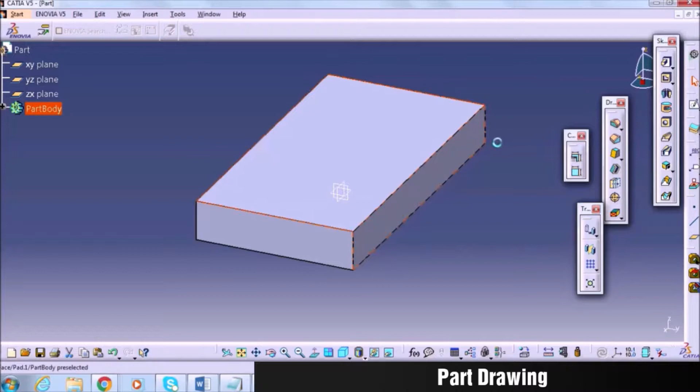Select the surface and go to sketch. Draw a smaller rectangle inside the surface. Each side must be equal to 10 millimeters equally.

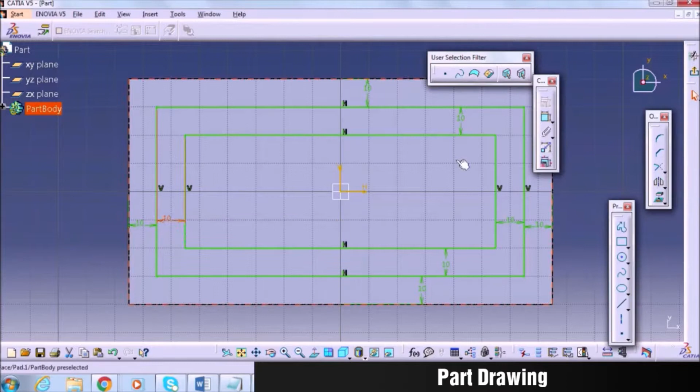Draw another rectangle shape inside the smaller rectangle with another 10 millimeter equal distance, and then corner it with 10 millimeter radius.

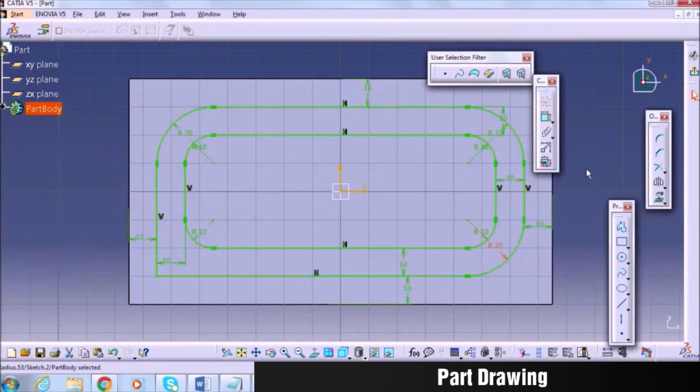For the second larger rectangle, corner with 20 millimeter radius. Exit workbench and pad it with 10 millimeters.

Then sketch the outer rectangle and draw a circle at each corner of the plane with the length of 10 millimeter sides.

Then mirror the circle at the center for 4 parts, 4 corners.

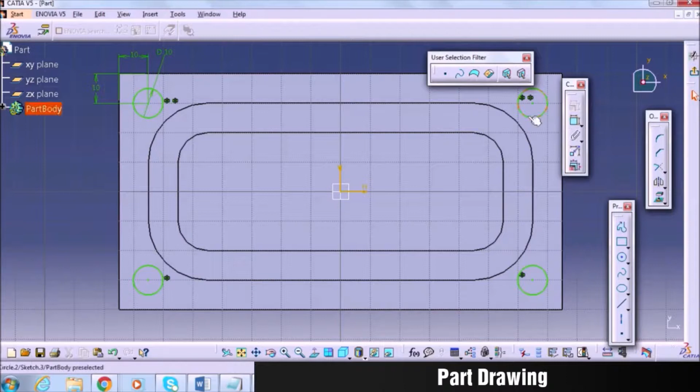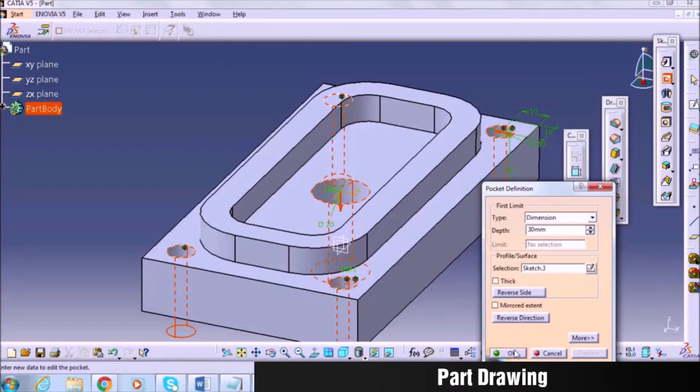Draw a center circle with 20 millimeters and workbench, then press pocket with 30 millimeters.

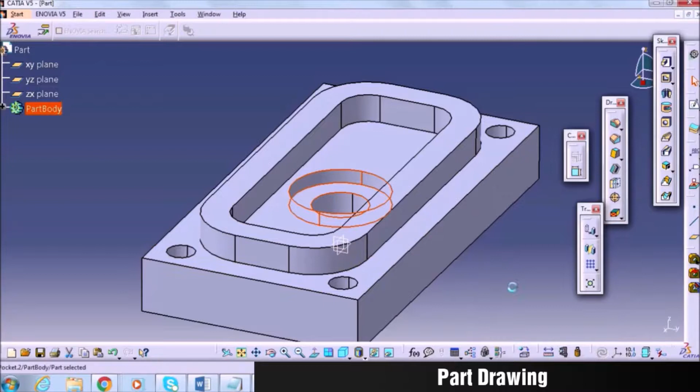Draw a bigger circle with a 35 millimeter diameter. Exit workbench and pocket it 5 millimeters.

Then choose the XY plane and sketch. Draw a rectangle with a length of 150 millimeters and the height of 80 millimeters. Centralize it.

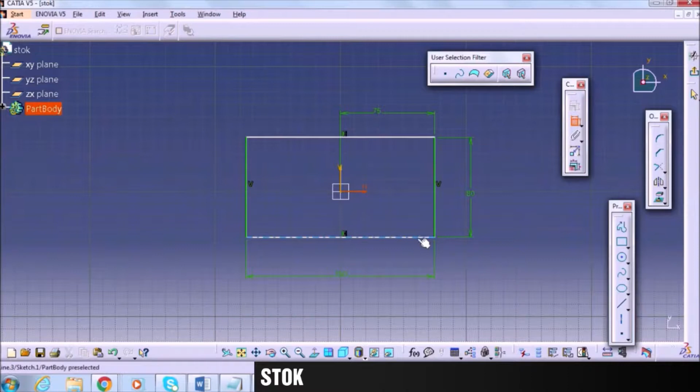Exit workbench and pad it with 40 millimeters.

Okay, the next part is assembly. Go to mechanical design and press assembly design.

Go to component, existing component, and choose the part 1 and the stock.

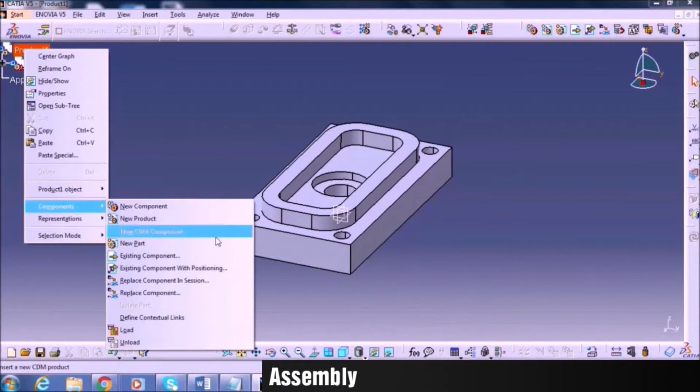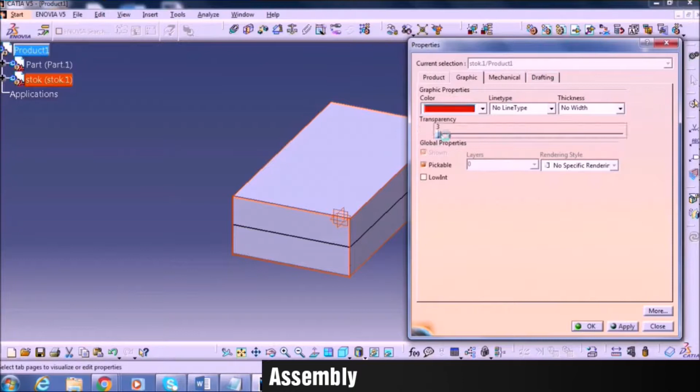Go to properties, then choose the color, and choose the transparency. Put it at an optimum level so that you can see the stock and the part. Press apply and OK.

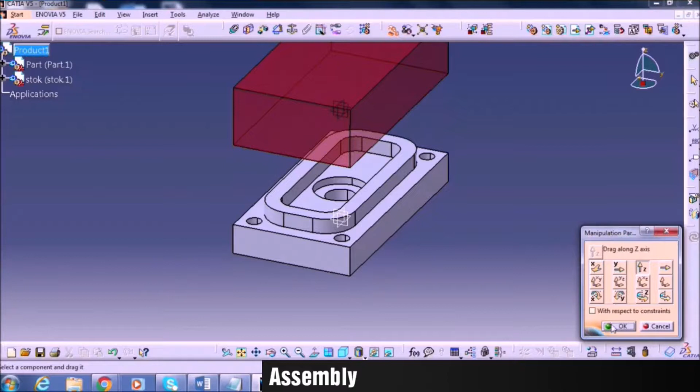Move the stock part above and offset the bottom part of the stock and also the bottom part of the part. Offset at the value of -5 millimeters.

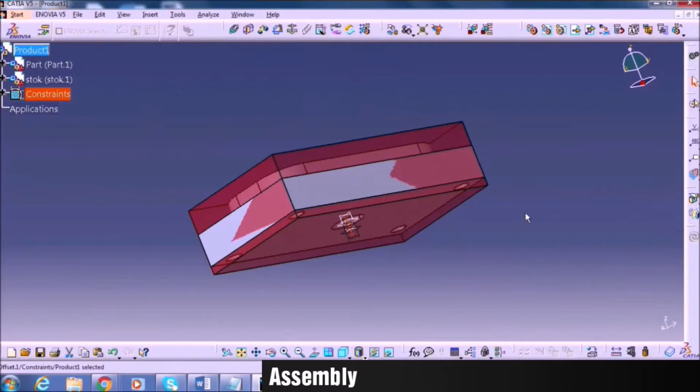Next, press start. Click on start, select machining and select advanced machining.

Choose part operation, double click it and select default reference machining axis. Select the center point and click on the upper left side corner.

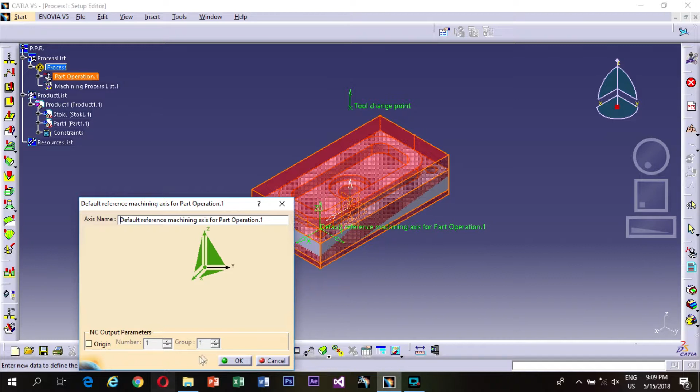Press OK, and the part operation option will pop up. First click on stock and hide it.

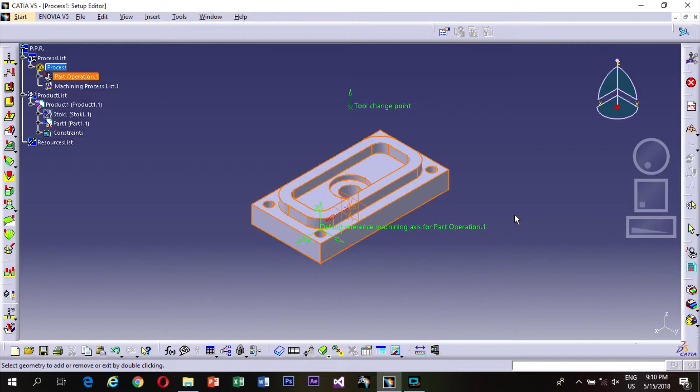Click on the design part for simulation. And click on the top part of part 1.

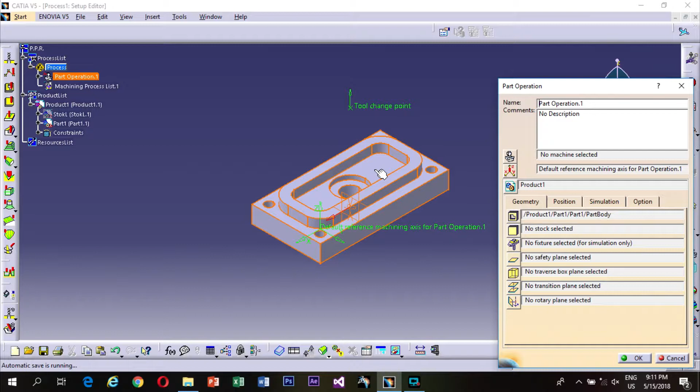Click on stock and unhide it, and click on the stock and click the upper part of the part 1 of the stock.

Click on the safety plane and hit the upper part of the stock. Click OK.

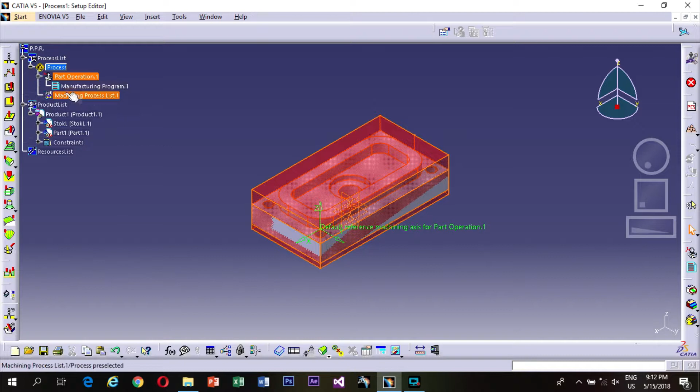Click on the machining process to check out the default reference machining axis for part operation.

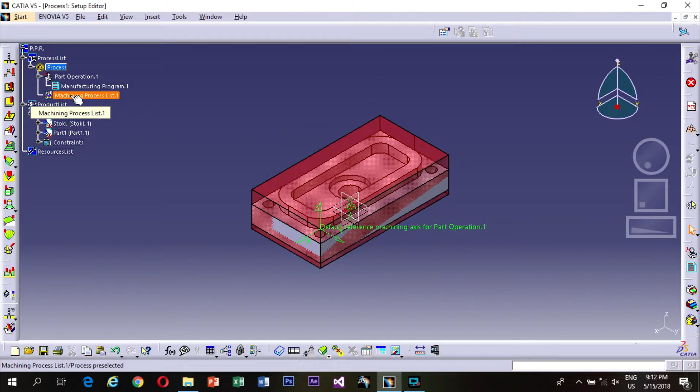Click on the manufacturing program and hit on the roughing mechanism.

Click on the rough stock and click on the upper part of the stock. Click on the safety plane and also hit the upper part of the stock.

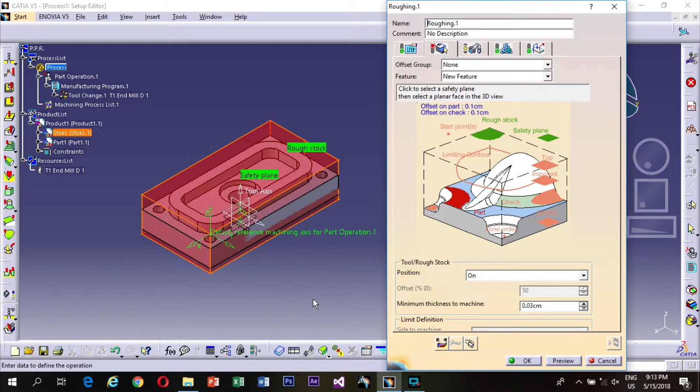Click on bottom, go to the other side of the part and click at the bottom part of the part.

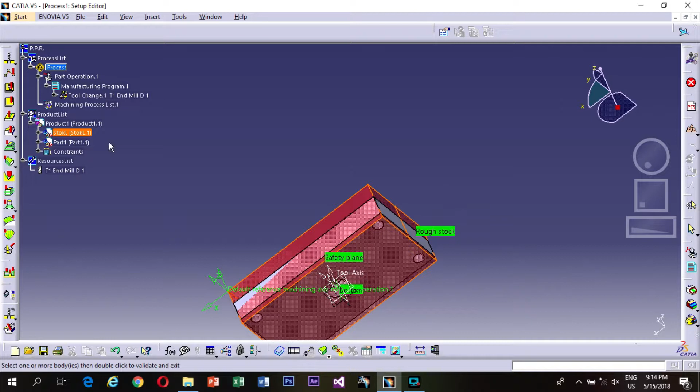Click on the part, unhide the stock, and hit the upper part of the part 1.

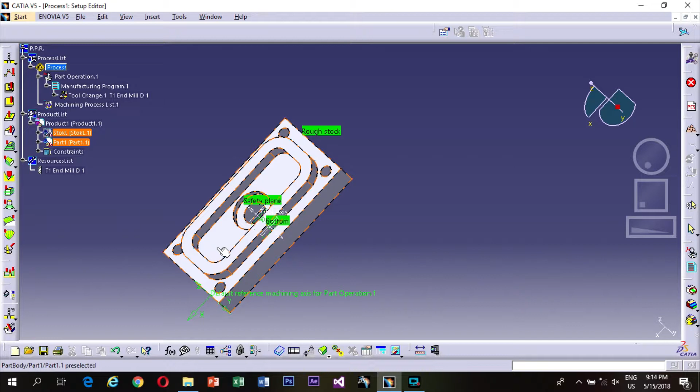Check it out properly and move out to the first layer, the tool part style,

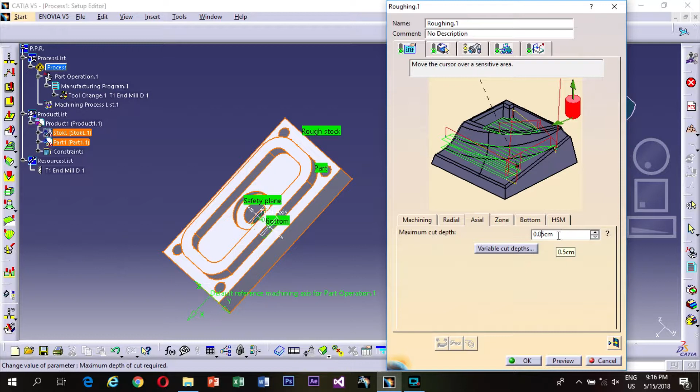Select axial and change the maximum cut depth to 0.05 centimeter. Go to the third option,

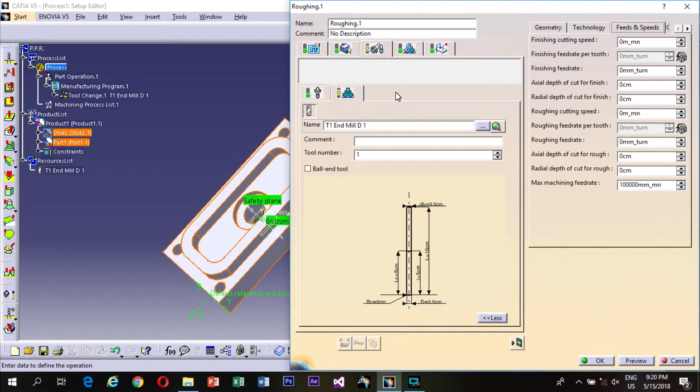Go to the fourth option. Untick the automatic compute from tool feeds. Put the machining into 10. Don't change the units, just write 10. And untick the automatic compute from tooling feed and speeds, which is the spindle feed.

Go to the final options. Change the mode to helix.

Go through pre-motion. Select with the A, with the arrow above, and change the value of 1 centimeter into 0.1 centimeter.

Make sure you choose the thin line. It is 0.1 centimeter, so don't get confused.

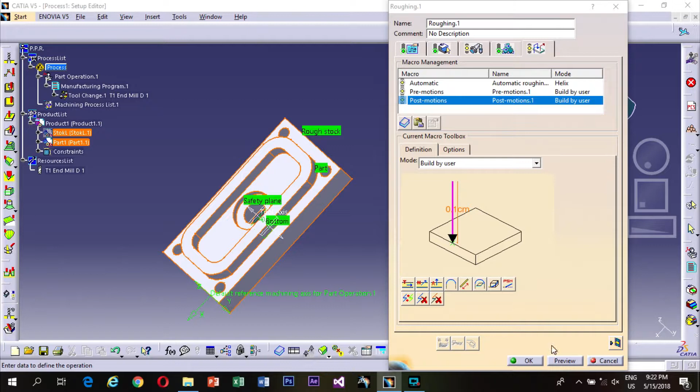Press preview again and press OK for double confirmation, select the tool path, and here you go, the roughing animation is here.

Make sure the green highlighted part is just on the upper layer. If it's in the lower layer, it will cut fully, so make sure it's only in the upper layer.

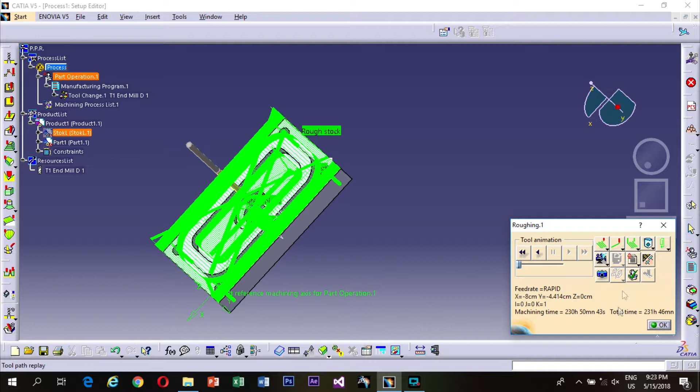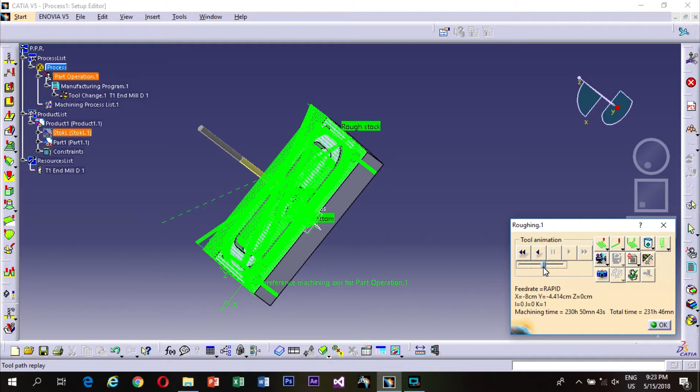Move the toolpath to check it out. Make sure it's in the correct angle so that you can record in a good position, and you can increase the speed by moving the slider and press the recording icon.

Press the forward replay button, and here you go. This is zigzag cutting.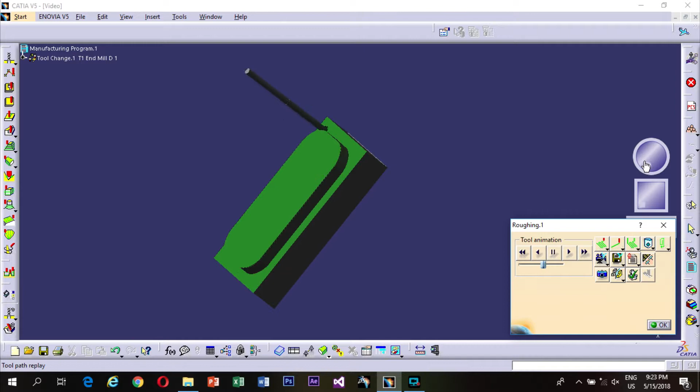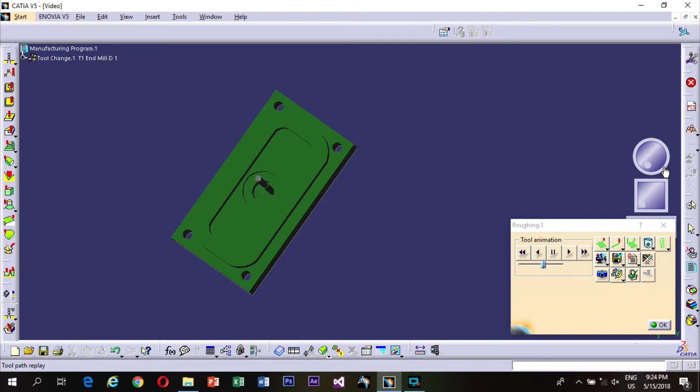You can change the angle to have a good view. Make sure it cuts beautifully to have a great design look, and make sure all the holes that needed to be there are present. That's it, that's the machining process, and I will give you a 360-degree view.

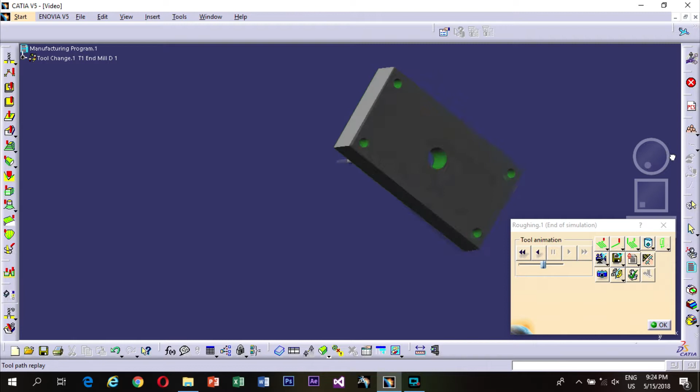And that's all. Press OK, and we will go to the next part, which is NC coding. Make sure to save this.

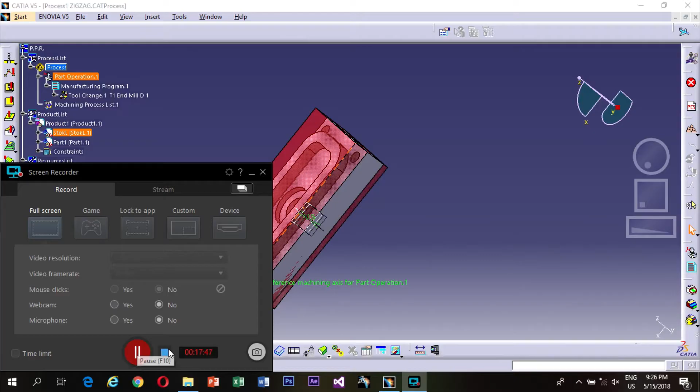Okay, time for NC code process. Go to tools, options, and press machining. Click output. For the post processor and controller emulator, press init, and the extension is NC.

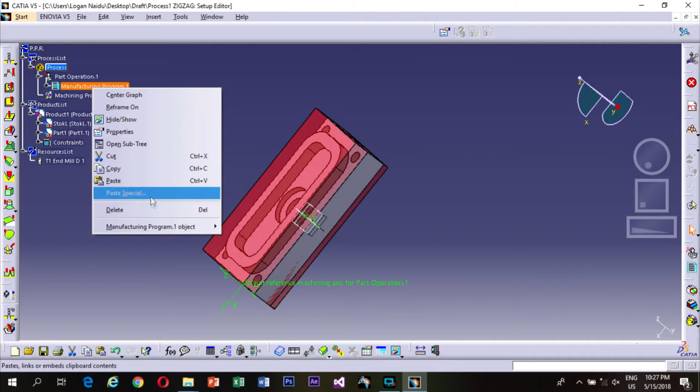Press OK. Let it load. Right click on manufacturing program, go to manufacturing program object, and generate NC output interactively. Make sure it's NC code, and the one file is for all selected program. Make sure you save it in the desktop.

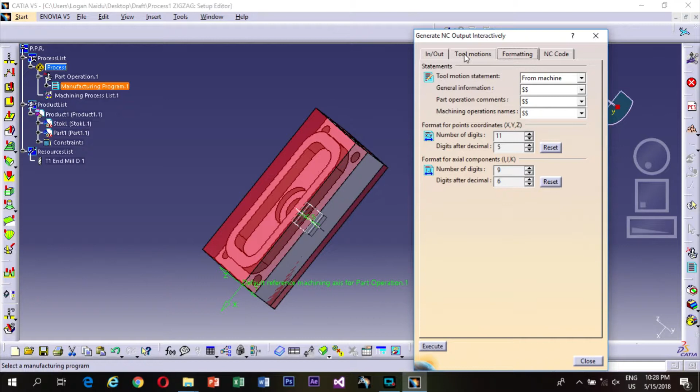Go to NC code, Cenit post processor, select Sinumerik 840D 3x.pp. Go to formatting, make sure it's in this setting, and also tool motion. Press In/Out, and execute it. Press OK, and the NC code will be displayed in the saved location, which is, in my view, the desktop.

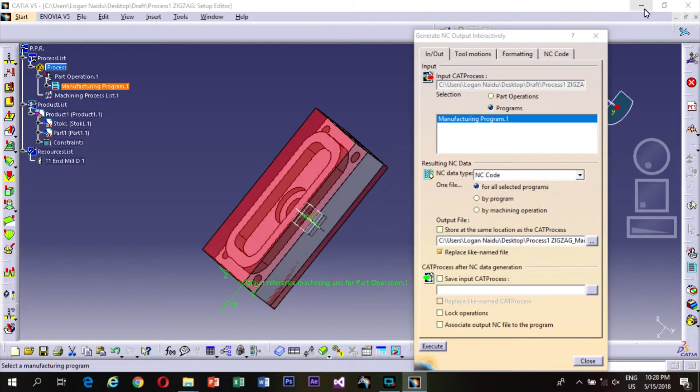So here it is, process zigzag, and here's the NC code. So that's it, simple as that.

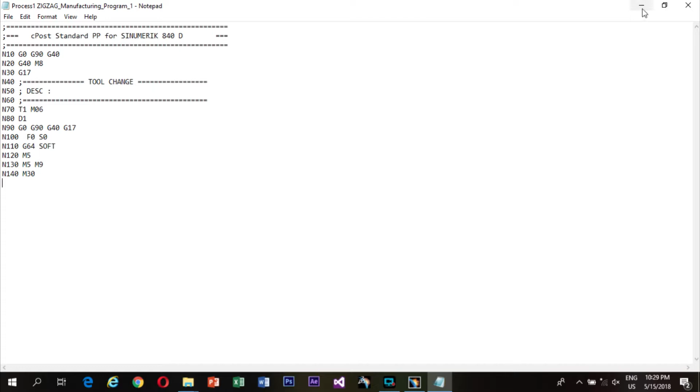And now is for the concentric process. You can use the same zigzag process layout, you can save it differently. So you choose on the part operation, go to the roughing, double click it, double click roughing, and you must redo again the roughing one process.

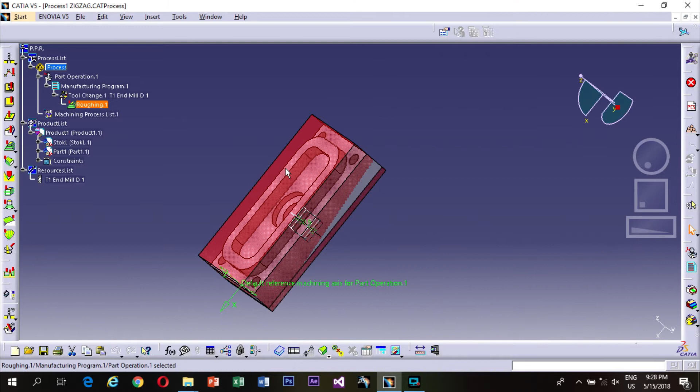Click on the first option, go to the machining, select the toolpath style. Nope, let me refresh again, double click on the roughing.

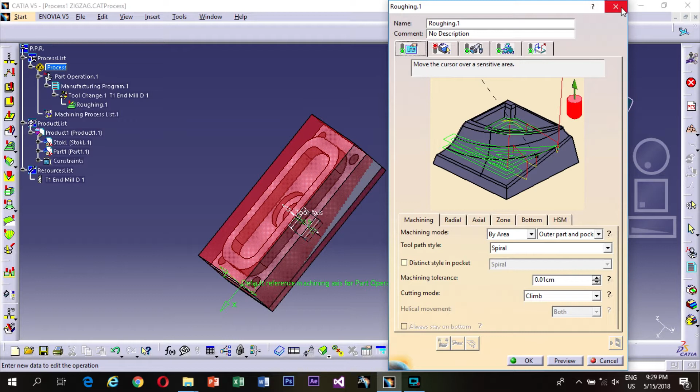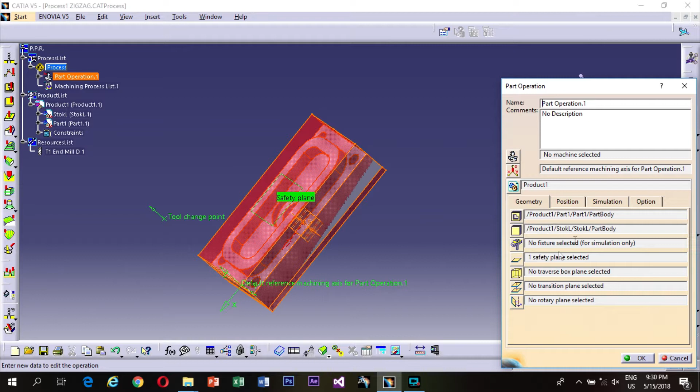Click on the part operation, and make sure to check the part body, the stock, and the safety plane is in the correct order. Make sure all in the correct order, and also the default reference machining also in the right order as in the previous zigzag process.

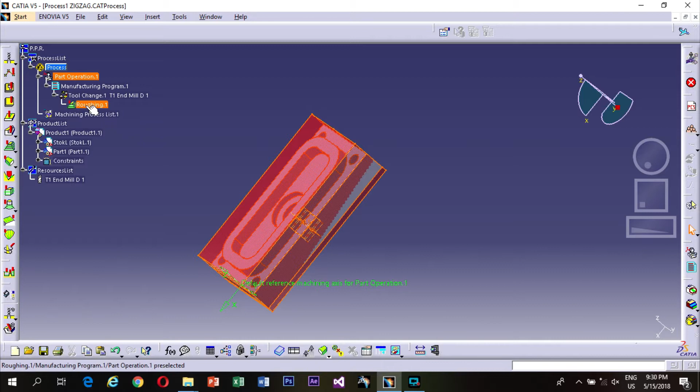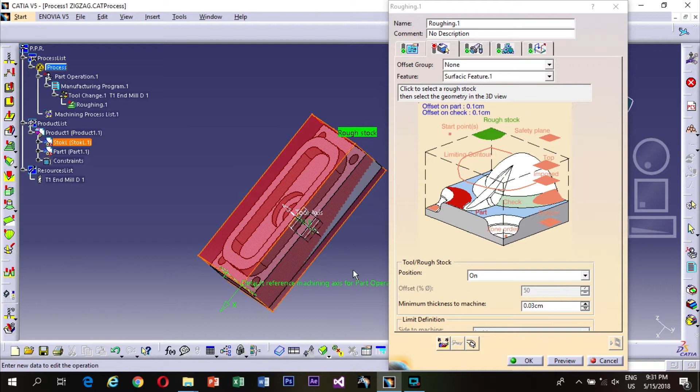Double click on the roughing, press the rough stock and hit on the upper part of the stock. Click on the safety plane and hit on the upper part of the stock as well.

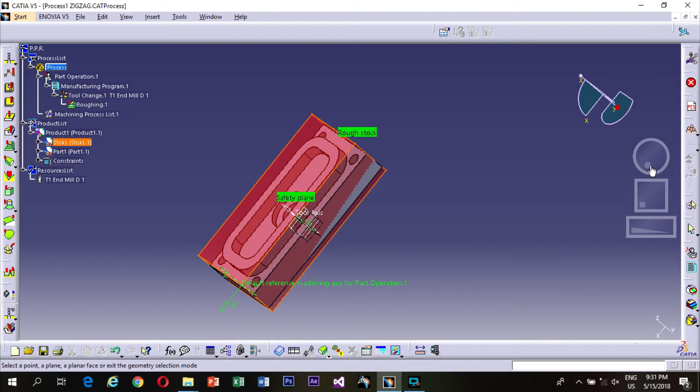Select on the bottom part and hit on the bottom part of the stock. Let me adjust it and turn it around.

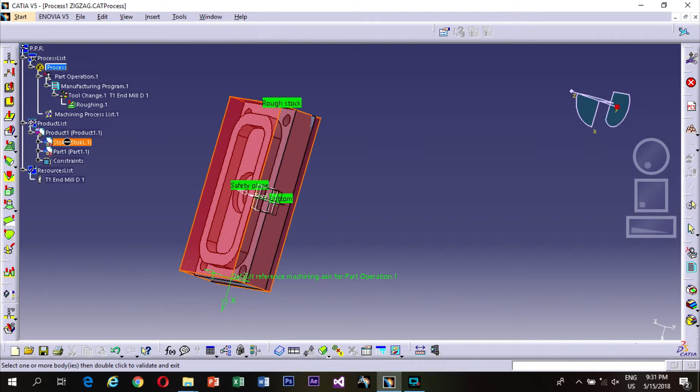Click on the upper side of the part, so you have to hide the stock and you have to click on the upper part of part 1, and there you go, same as the previous version.

Go on to the first option and change the tool path style, this time to concentric. Previously was zigzag, this time was concentric. And check the machining tolerance, make sure it's 0.01 centimeter.

Go to axial and make sure the maximum cut depth is 0.05 centimeter.

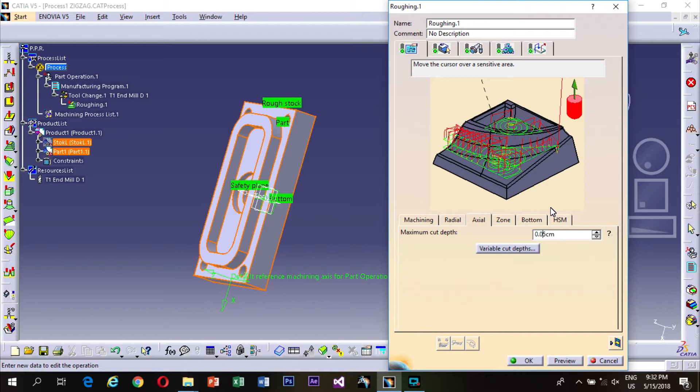Go to the third option, do it exactly the same as the previous part. Untick the ball end tool and press more. Check on the nominal diameter, corner radius, overall length, cutting length, body diameter and non-cutting diameter.

So we have to do a few adjustments here on the length. Alter the nominal diameter to 0.5 centimeter. The corner radius, make it 0. The overall length is...

The overall length is 10 centimeter. The cutting length is 5 centimeter. The length is 5 centimeter and the body diameter is 0.5 centimeter and the non-cutting diameter DNC is 0 centimeter. Make sure you get it right so that it will not cause any trouble during the cutting process.

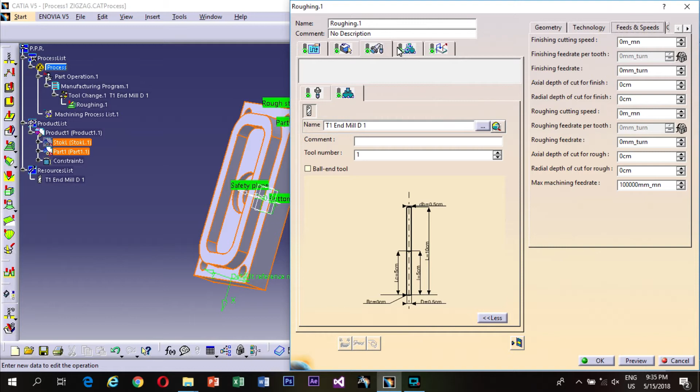and go on to the fourth option. Untick the automatic compute from tooling feeds and speeds. Untick the automatic compute for tool feed and speeds for both feed rate and spindle speed. Change the machining to 10 mm per minute.

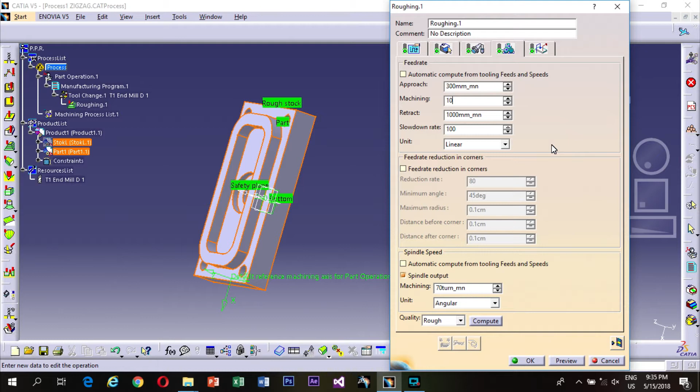And click on the fifth option. This time you can't alter the mode because concentric provides helical mode only. So make sure all the readings are good and go to the pre-motions, select the A arrow and change the 1 centimeter to 0.1 centimeter.

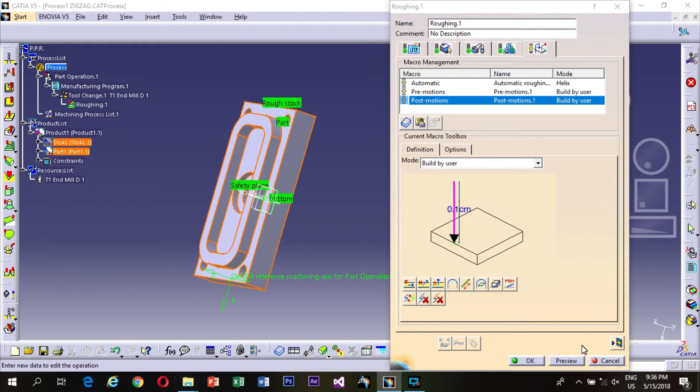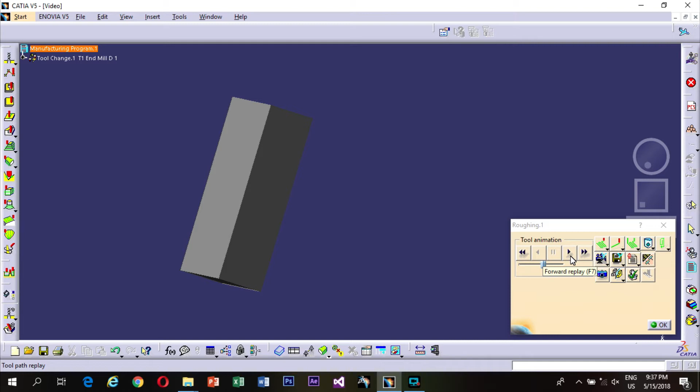Press the preview button and press OK. And click on the toolpath computation, let it load, and as again make sure the upper part is highlighted green so that it will not affect the cutting edge, and press the recorder, adjust to a good viewing, and press the forward replay, and it will start to cut.

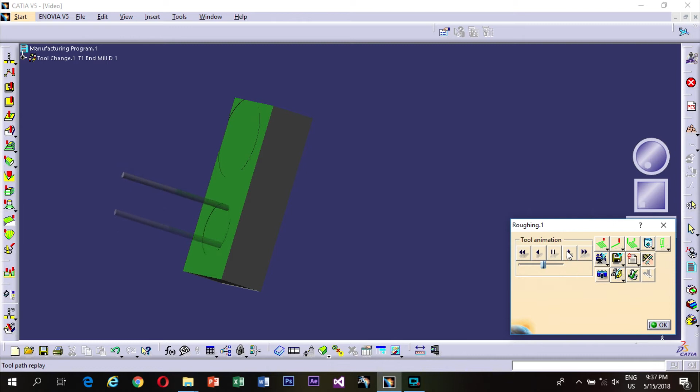This will take a bit longer than the zigzag cutting tool, so you gotta be patient.

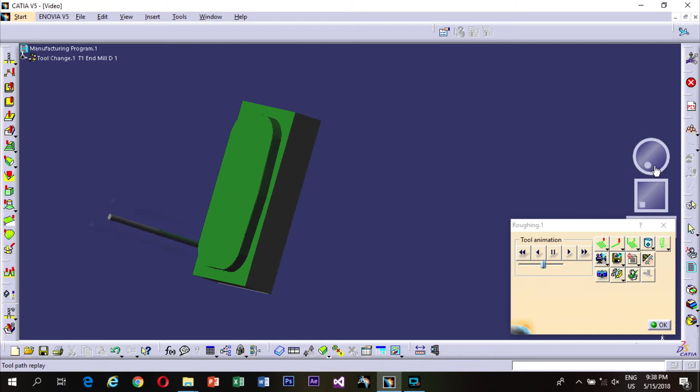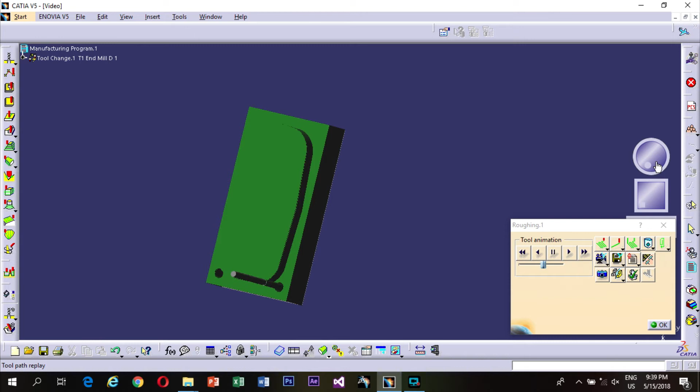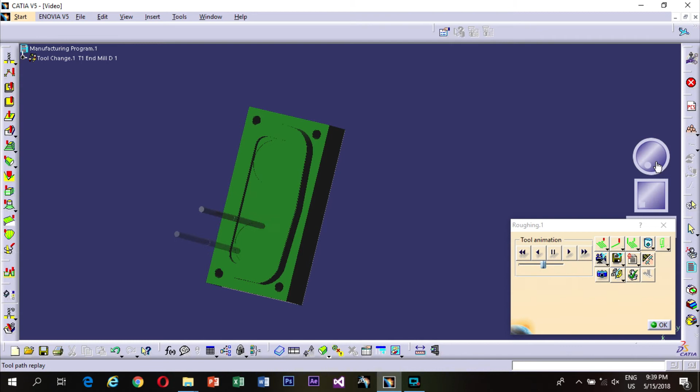And here you can start looking at the holes being created. And we are almost there, just for the last hole.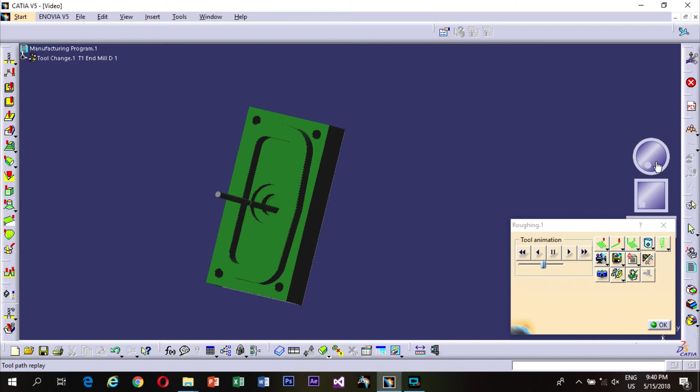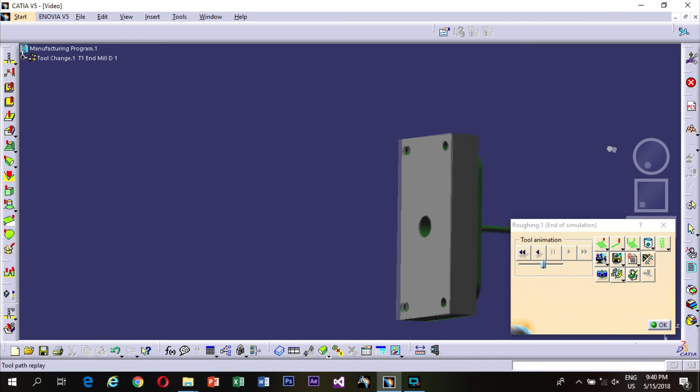And that's all. That's it for the tooling mechanism for concentric tool part. And I will give a 360 view. Have a look, all holes are there. And that's it.

Press OK, and we will go to the next step. This is for concentric NC code.

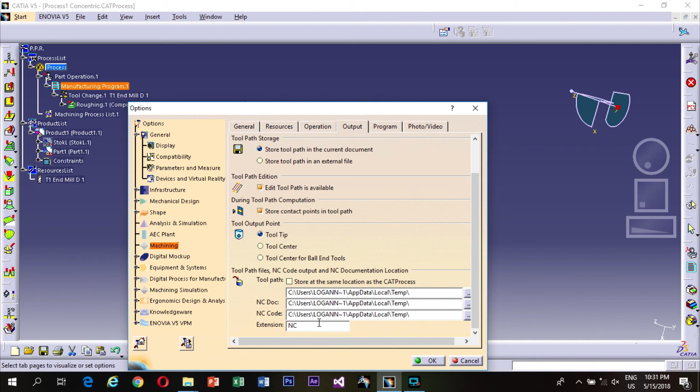Click on tools, options, machining, output, init. Make sure the extension is NC. Press OK. Right click on manufacturing program, select manufacturing program object, generate NC output interactively, save it in the desktop,

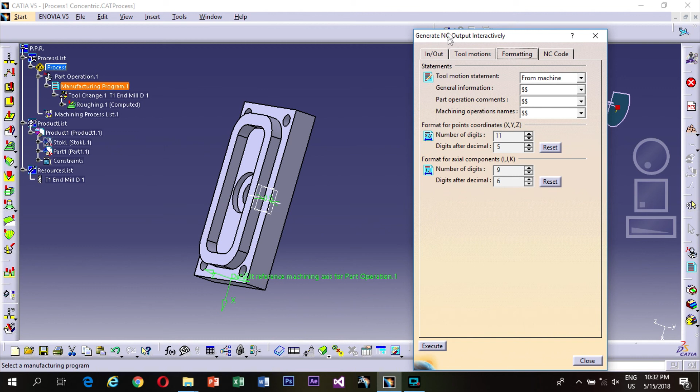and go to NC code. The post processor must be Sinumerik 840D 3XVP, tool motion same setting, formatting same setting, in/out and executed. Make sure the NC code

and for all selected programs. Execute it, and it's loading. And press OK. Go to the desktop to search for the NC code.

And where it is. And yes, here it is. Process for concentric, and here's the NC code for concentric process tool. That's all. Thank you very much.